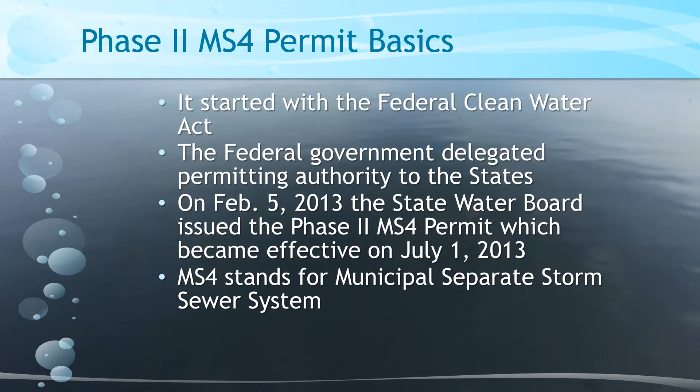Now this permit became effective on July 1st, 2013, and as I mentioned, I got ahead of myself, but MS4 stands for, again, Municipal Separate Storm Sewer System. It became effective July 1st, 2013, and it's a 5-year permit cycle.

Each year we call a permit year, and the permit years are the stormwater year. So here in California, if we want to know how much rain we got this year - or maybe we should say how little rain we received this year - we'll look in the newspaper and it'll give a number, and that number will go back to July 1st.

So if we look in the paper today, if they're doing it correctly, it should be measuring rainfall back to July 1st, which is nil to none here in the state. Hopefully with the El Nino year, what they're predicting, we'll see more in the future.

But the same way in the regulatory world - when it comes to stormwater regulations, it's July 1st through June 30th. And so those are our permit years.

Now, many of these requirements are new to these Phase 2 municipalities. And the state fortunately gave them some time to basically phase these things in, to ratchet up their program. And so they allow certain aspects of the program to begin during different years of the permit.

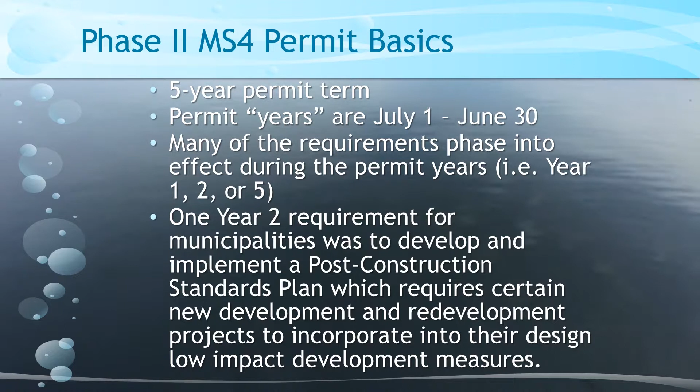One of those requirements for year 2 was for municipalities to develop what they called a post-construction standards plan, which requires certain new developments and redevelopment projects to incorporate into their design a process called low impact development measures. And we'll talk more about this - what is that, and what did that involve?

So the Phase 2 MS4 permit also required some other things like adequate legal authority. The state realized that when they were delegating authority down from them to the municipalities to help implement a lot of these stormwater goals they had, the municipalities would need to develop their own legal authority to be able to enforce it.

So one of their permit requirements was to adopt or revise new municipal code, new city ordinances that would require it. And it covered many different areas. One of the areas specifically that we're going to talk about today involves new development and redevelopment. But there were other areas that their ordinances had to address, such as during construction.

So erosion and sediment control plans need to be implemented during construction, and there needs to be inspections. And there's other areas involving illicit discharges - you've heard 'only rain down the drain.' So the municipalities had to basically build this adequate legal authority to cover that.

And the Phase 2 MS4 permit required project owners and the municipality to continue to monitor these devices that are being installed to mitigate stormwater measures. So a lot of times we use the term treatment, and we'll talk about this more later, but what is treatment? Well, in the context of this permit, treatment falls into several areas.

One, infiltration, where we're infiltrating water into the ground. Two, bioretention, which is using like a rain garden - it has some infiltration, but it also incorporates another aspect called evapotranspiration, where we're using either plants or solar heat to evaporate or transpire water into the atmosphere.

And then the fourth is capture and reuse - a big topic during this drought about being a good steward of your water runoff and capturing that and reusing it if you can. Now, what do all four of those have in common? Those four areas of treatment?

Really, what it does is it reduces the amount of discharge, does it not? Whether you're infiltrating, bioretaining, evapotranspiring, or capturing and reusing, all of those have in common that you have less discharge.

The first one is to take a project and basically divide it into logical segments when it comes to drainage. They call them drainage management areas. Some projects are diverse, and water is being dealt with in different ways in different places, so the state wants it split up into these DMAs, these drainage management areas. Other projects are quite simple, with really only one basic way water is handled, and therefore it can have a single drainage management area. Again, we'll come back to this and talk about this in more detail.

It requires including source controls for certain types of specific activities, and we'll see how that plays out. It requires the incorporation of LID measures into the design. There are 9 distinct measures that we will cover that the state requires.

It requires treatment of stormwater, and as I mentioned, that's through these methods: infiltration, bioretention, evapotranspiration, and capture and reuse. It requires not only speccing out these treatment methods, but sizing them so that they meet the objectives specified in the permit. And then there's very specific numeric objectives given. We're going to go through a couple calculators that you can use to meet that.

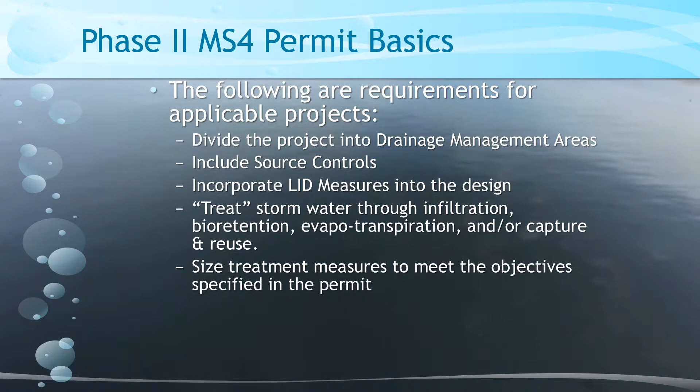And then it also incorporates what we call hydromodification measures. Hydromodification is a big word, but if you break it down into just what it sounds like - hydro, water, modification, to modify, to change - the idea is that when you develop, you have hydromodification. Now, when I use that term, I use it in a neutral cause and effect way. In other words, I'm not here to say new development's bad because it changes the way water should drain off your site, therefore we want to avoid new development. No, when we use, and I believe when the state uses hydromodification, it says when you design, you can't help but modify the way water runs off. If you're creating impervious surfaces, you're changing the way it is. Therefore, let's understand that process and see if we can offset some of that by the way we design our project. We'll go through that more in a moment.

And then also, it requires not that you just do this in design and that you actually construct it, but this permit actually requires the municipality who is overseeing this program and the owner of the project to have a perpetual obligation to what's being installed. And there's no off-ramp, which is a little bit scary, but basically these systems need to be installed and, according to the state, need to be kept in an effective state of operation. So there is a requirement to have an operation and maintenance plan, a requirement to have an annual self-certification by the owners of these devices, and an obligation for the city or county to make sure they are kept in an effective state of operation.

Of course, like with any regulation, there are some exceptions, and for time's sake we're not going to delve into that at this point. Next level are called small projects according to this permit, and they are projects creating or replacing 2,500 square feet to 5,000 square feet of hardscape.

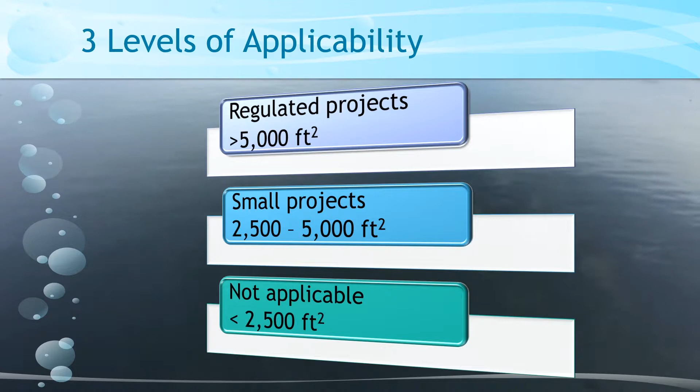And then the top tier are the regulated projects. Not that small projects aren't regulated, they are, that's just what they call them. The top level is called regulated, and that's 5,000 square feet or more. Let's take a closer look at the small and regulated projects.

So small projects specifically includes new construction creating impervious surfaces between 2,500 square feet and 5,000 square feet. So if it's a new project creating that, could be a new parking lot, could be a new school. We'll look at some examples, including a very specific example later.

It could also be redevelopment, a demolition of another small site and redeveloping that site. And if you are even replacing a hardscape or impervious surfaces of 2,500 to 5,000 square feet, then you would be a small project, such as the replacement of even a parking lot between 2,500 and 5,000 square feet.

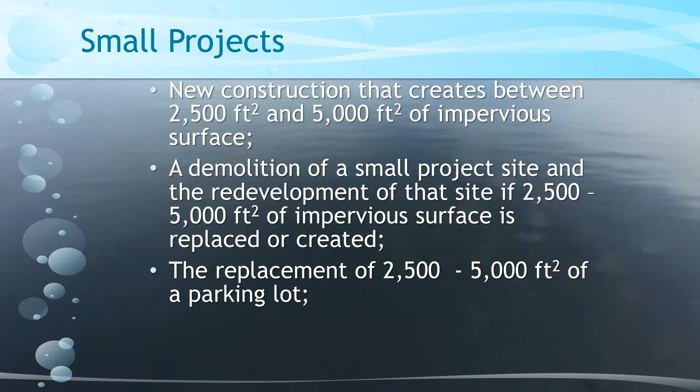Now, small projects also include the construction of a new parking lot that's less than 5,000 square feet. Now catch that subtle difference: one was redeveloping a parking lot, basically replacing a parking lot, one was a new parking lot.

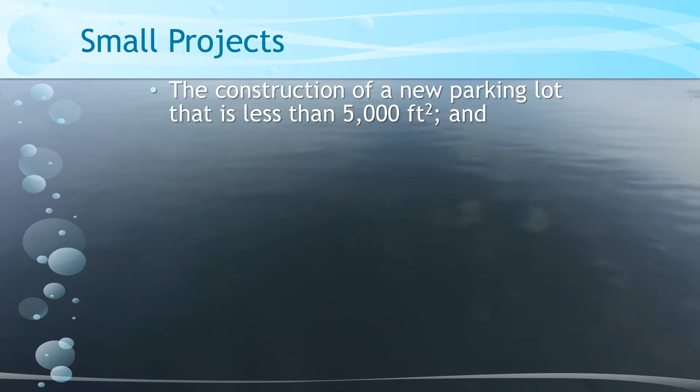Now some of you who are more educated in this should be thinking about, what about routine maintenance? I thought resurfacing a parking lot doesn't trigger these requirements. Well, you're partially correct. It keeps you out of the regulated class, but it still kicks you into that small class. Now before you start hyperventilating, this small class is not really a big deal, so it'll probably be okay. You're not going to really have a hard time meeting this.

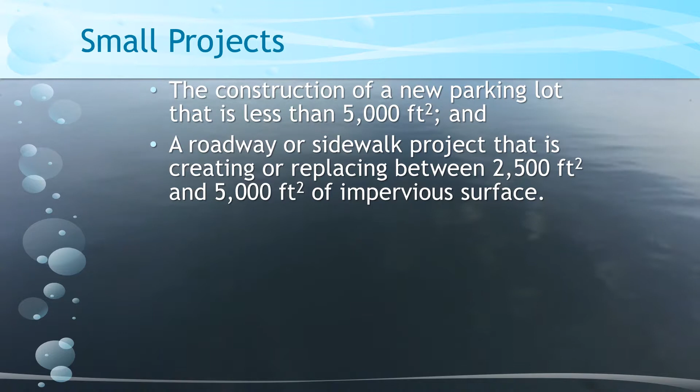Other small projects, according to the permit, is a roadway or sidewalk project that is creating or replacing between 2,500 and 5,000 square feet of impervious surface. It also includes, here's another acronym for you, LUPs. You may recognize that from the construction general permit. But linear utility projects, what are they? Well, they could be underground projects like a water main project, a sewer line project. It could be an above ground utility like a PG&E transmission line. They are not considered to be part of small projects. We'll see another reference to this later.

And a single family home is a small project, will always be a small project, even if it's a really big single family home, bigger than 5,000 square feet. Even if it's a lot more, it will always be a small project. Now, unless it's part of a larger common plan. And we're going to look at some examples today of that. Once it is part of a subdivision, it would then very likely be regulated.

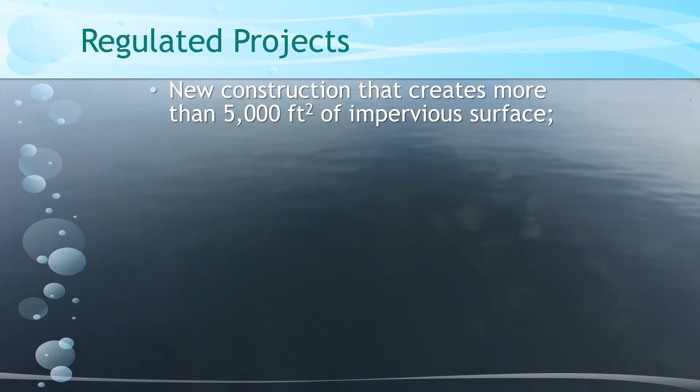Okay, now let's turn the corner and look at regulated projects. What are regulated projects? Well, as we saw on the first slide, it's creating more than 5,000 square feet of impervious surface. And it can also be what's called significant redevelopment. So it's where you have maybe a demolition of a site and the redevelopment, the replacement of impervious surface, that's 5,000 square feet or more. Or it could be replacement or creation in a redevelopment project. The replacement of more than 5,000 square feet of a parking lot would also be a regulated project.

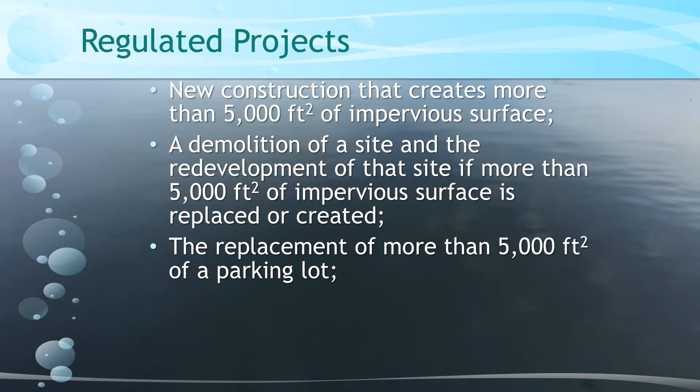But let's look at some things that regulated projects do not include according to the permit. And it's probably an easier way to define regulated projects by looking at what's exempt. And so these are real important to take a look at. As I mentioned just a moment ago, a single family home, detached, that's not a part of a larger common development or common plan, they are considered to be a small project. It doesn't matter how much square feet of impervious surface they have or are replacing, it will always be a small project. Projects that are exclusively interior remodels, if nothing's changing outside, it could even be a huge warehouse. If it's exclusively interior, it is not a regulated project.

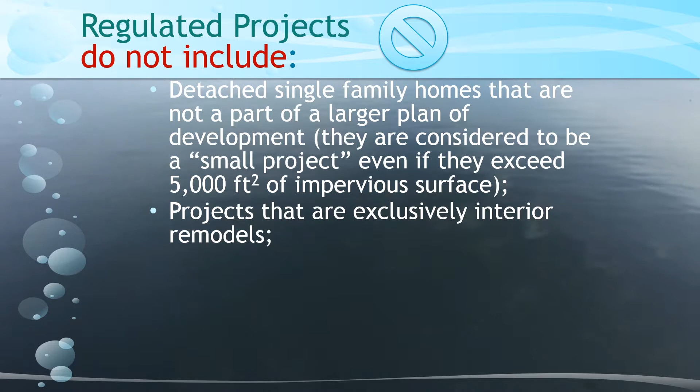Routine maintenance or repair, such as an exterior wall surface replacement. Now, if that could be categorized as routine maintenance, then possibly you have your exemption there. But if it's a facade replacement that's not considered routine maintenance, and that's really who's going to make the decision on that, it's really going to be the municipality's plan check process. They're going to make the call. They're the ones interpreting this regulation, and they're going to look at their post-construction standards plan, make that call. Pavement grinding and resurfacing within the existing footprint is also routine, and roofing replacement or repair is also routine.

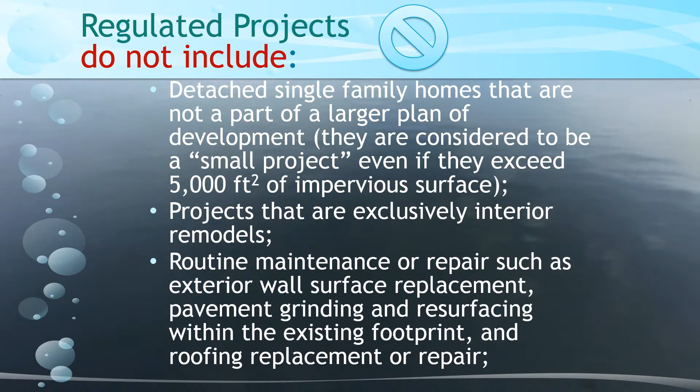But we did a project here, I think it was early this week or late last week. We're looking at a concrete or sidewalk replacement, and we could not fit that under routine maintenance. However, on that same project, they were doing a parking lot resurfacing, and that clearly was routine maintenance. So the municipality we were working with would not accept that our sidewalk was routine maintenance.

Other things that are not included would be projects consisting solely of sidewalks or bicycle lanes built as a part of new streets or roads and built to direct stormwater runoff to adjacent vegetative areas. And this is language right out of the permit. Projects consisting solely of impervious trails built to direct stormwater to adjacent non-erodible permeable areas. Again, it's kind of meeting already the intent of it, and maybe that's why they're exempting it. Projects consisting solely of sidewalks, bicycle lanes, or trails constructed with permeable surfaces. Is DG, decomposed granite, a permeable surface? Good question. Technically, yes. Functionally, probably not. But technically, it would be considered a permeable surface.

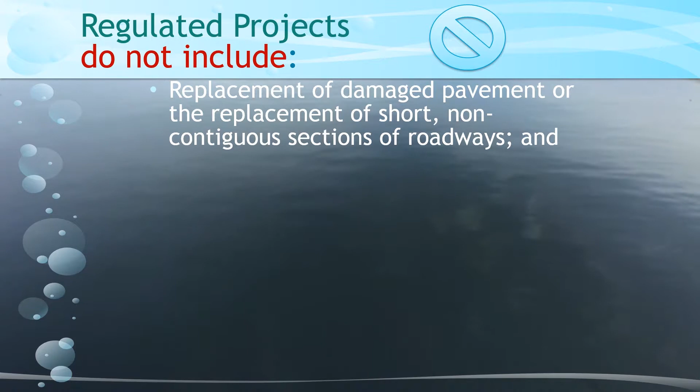All right, and other projects that would not be considered regulated would be a replacement of damaged pavement. And I think this may have been one of the questions we were getting at too. Replacement of damaged pavement or replacement of short, non-contiguous sections of roadways. So roadway repair, sidewalk repair, because the roots are pushing up sidewalks. That would not be a regulated project. Now, please remember though, it could still be a small project. We're just talking about what's not a regulated project.

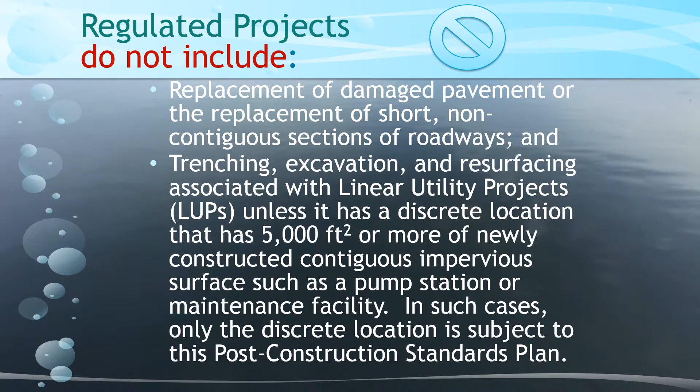And trenching, excavation, and resurfacing associated with those LUPs, those linear utility projects, unless it has a discrete location that has 5,000 square feet or more of newly constructed contiguous impervious surface areas. What are we talking about? It would be like maybe pipeline companies putting in a pipeline, and then they have these breakout stations or these pumping stations or these control stations where they have a parking lot, maybe they have a small office building. And so that would be a type of project that, although it is a LUP, it is a discrete area that could be considered a regulated project.

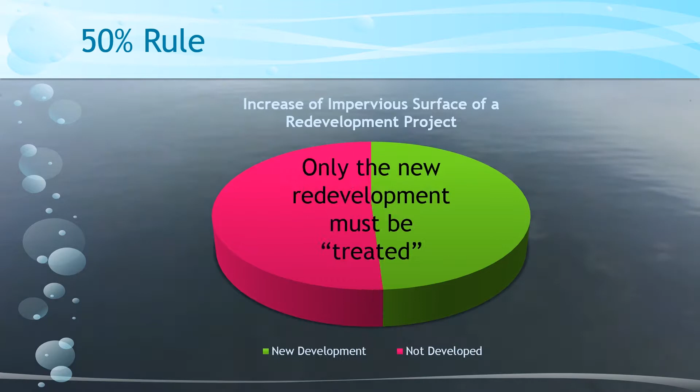Conversely, if it's more than 50%, then the entire project has to be treated. And so that's a number to look at.

Now, some of you may also do capital improvement projects. That's something important to remember there. Roadway projects, you want to look at that number. And there's some specific language in the permit and also in the post-construction plan that deals with roadway projects in regards to this 50% rule. But in general, if it's less than 50%, you're only dealing with that. If it's more than 50%, you're treating the entire project, the entire site.

So we covered the why. We covered who needs to be covered or subject to this. Now let's talk about the what. What is required? And this is where we're going to get more into the nuts and bolts now of how this works.

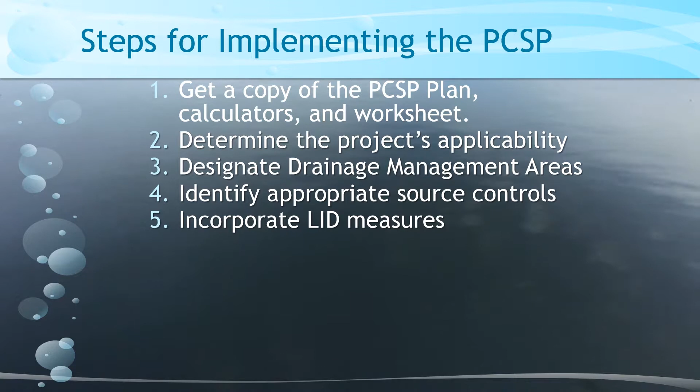So there are some steps for implementing this post-construction standards plan that I want to cover. First off is get a copy of the actual document, the post-construction plan, the calculators, and the worksheets. Determine the project's applicability. Designate those DMAs. Identify appropriate source controls. Incorporate the LID measures. Select and size those treatment controls. Incorporate hydromodification measures, and then prepare the submittal. I'm just going to list these out, and we're going to go through each one of these one by one. So let's take a look at the first one.

You need to get a copy of the plan, which, if you are in the City of Chico, good news is you had one. I don't have one right here in front of me, but it looks like the one on the screen. You got a copy of their draft plan that they are quickly on the way to revising. And actually, this series of workshops is part of their process of finalizing these plans. This is part of their outreach to the community, to the stakeholders who are going to be having to work under this, to get a view of how this process works and for you to be able to review the draft plan.

Now, if you have any questions, you can contact Angela Spain. Angela, raise your hand. Or Rich Burgee, right behind her. And Rich, how can they get a hold of you if they have questions or comments? Or Angela, who's the primary contact? We'll have some business cards on the table. Okay, so there'll be some business cards back there. And as you go through this document, take a look at that. But basically, this is what's going to be required of new development and significant redevelopment.

This calculator will be downloadable from each municipality. The one you see on screen actually came from the State Water Resources Board and was originally used as part of the construction general permit. Those of you who write SWPPP plans for construction sites probably recognize this. Now it's actually on the State Water Board's SMARTS database website. This calculator was developed by the Water Board for small projects operating under the Phase 2 MS4 permit, and we'll come back to that.

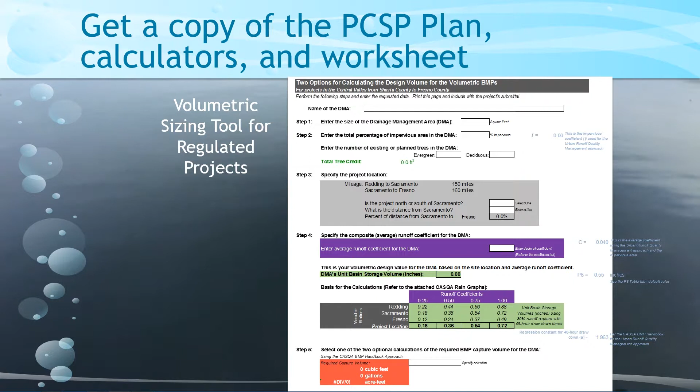This calculator here is a volumetric sizing tool we created as part of this collaborative effort to make sizing of BMPs easier. We'll go through it and show you the two approved methods for sizing BMPs. You're given an option as a developer which method to use. We've noticed that sometimes one method is more advantageous than the other, so we wanted to give you the ability to choose whichever is more advantageous for your particular project. This is also an Excel spreadsheet you'll be able to obtain.

The next item is to determine your project's applicability. Now, for the remainder of this talk, we're going to take a look at a fairly typical project. This is actually a real project, not here in Chico. It is a project that I worked on in Benicia.

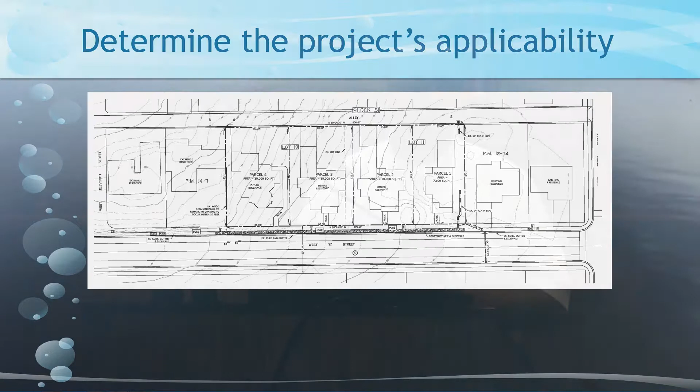Benicia is part of the Bay Area. Their regional stormwater permit, they call that the C3. Those of you who have done development in the Bay Area know it by C3. That's their post-construction standards program, and that's been in place for quite some time now. There are a lot of similarities, some subtle differences, but a lot of similarities.

So this is a real project that went through these post-construction standards and treatment. An example of a small project would be, we're looking at a plan here of 4 new parcels, but let's say only one of those parcels was actually going to be built. The rest, they aren't going to build, but right now it's only going to be one house. That is, as we saw earlier, a small project. Doesn't matter, could be 6,000 square feet, could be 20,000 square feet. It doesn't matter how many square feet of new or replaced impervious. If it's a single family home, not a part of a larger common plan, it is a small project.

Now, though, if we had all 4 of those lots being developed, which was the actual case of this project, on the right-hand side they had a small existing home that I think they were going to greatly renovate and then add 3 new homes to the west, basically. Then that would be a regulated project. Why? It's no longer a single family home, and it is certainly over 5,000 square feet of new impervious surface. So that would be a regulated project.

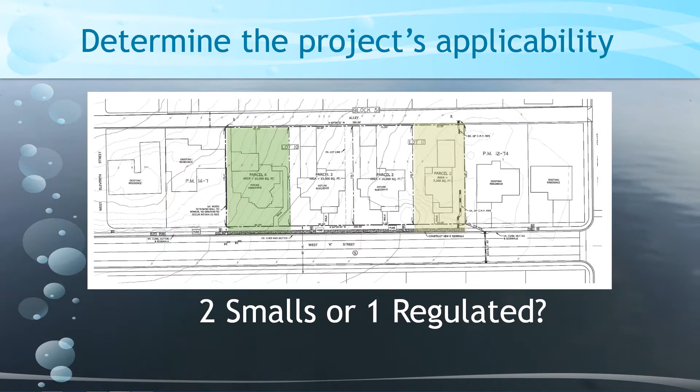Now, what about this scenario? And we see this a lot. 2 different homes being developed, especially in these post-recession times. Well, some people say we're still in the recession, but hopefully we're getting out. We see unfinished lots that are now starting to be developed upon. What if we had 2 of them being built on? What if we had 2 different contractors building on them, maybe two different owners? Would it be two small projects or one regulated project? What do you think? How about some participation? Two separate owners, it would have to be two small projects.

Two small projects? Although was the land split into the four parcels from one person? You're asking the right questions. It's really going to depend, ultimately, on the map approval. Is it still under a valid tentative map? What if the map is expired? And I'm talking to planners. You guys know your business way better than I know it. But if it still could be considered part of a common development plan, and it still has a valid map, then yeah, it probably could be considered part of a common plan.

Is there a lot size max in there for that? Not in this regulation, there's not. The only thing we looked at is things we've already seen, the 5,000 square feet or the 2,500 square feet. But in this case, if you had two projects even being built by two different individuals, but it was part of the same approved plan, then it very well could be considered regulated. Now it gets really muddy really quick.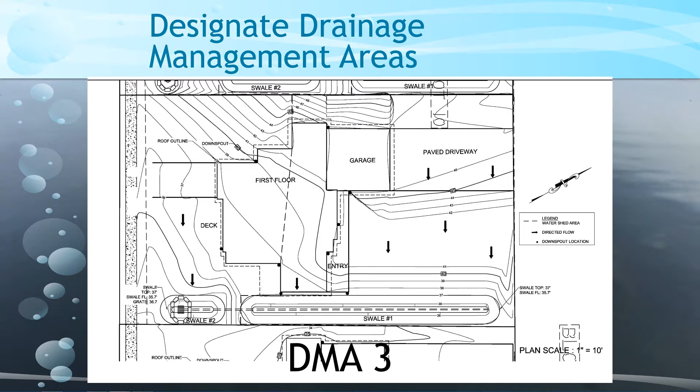DMA 3, kind of a 2-part bioswale. And then what is a bioswale? A bioswale goes under different names, rain garden.

Basically, it is a bit of a detention center where it's combining 2 of the aspects: infiltration, giving a place for water to infiltrate into the ground, and also using the evapotranspiration effects where the plant uptake. So typically a bioswale would be a depressed landscaped area that has been engineered.

So usually there's as much or more below ground than you see above ground. For example, you have some engineered soils, and you'll see a spec as we get towards the end of our talk that's got to be 18 inches of growing media. You're going to have usually a rock layer for reservoir capacity. You typically have an underdrain that will allow excess water to flow off site to maybe the storm drainage system or some other place, maybe a retention basin or some other destination.

So it's allowing water to flow to it, to infiltrate, to evapotranspire, and hopefully with the idea to reduce the amount of discharge. And so those would be our 4 DMAs. In this case, a fairly logical sequence because each particular home site is going to be treated separately with a bioswale there.

And you can see the source controls that are identified. These come out of the permit. This is a list of activities or pollutant sources that might be present or associated with a certain project. So for example, they say accidental spills or leaks, interior floor drains. Well, you might say, I don't have any interior floor drains. And what we mean by that is an interior floor drain that ties into the storm drainage system, not into the sanitary sewer. Parking or storage areas and maintenance, indoor or structural pest control, pools.

Now, residential could have pools, spas, ponds, decorative fountains. But some of these are very specific, like restaurants, grocery stores, fueling facilities. And again, what you would want to look at is the definition for each one of these, what's included in it, what's not included in it. Now, one of the things that's always bugged me about this is that some of these are really more activity than they are design, like the first one, accidental spills and leaks.

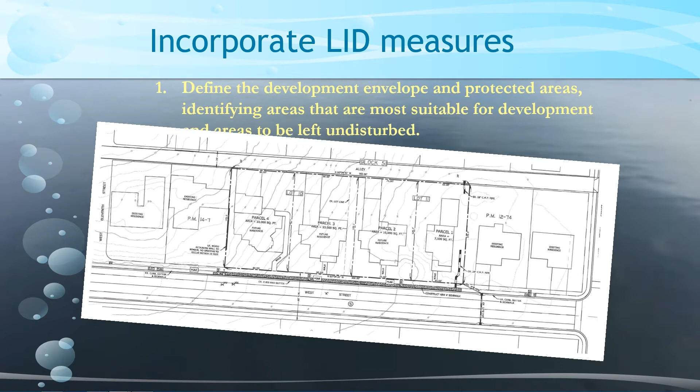So, first one, define the development envelope and protected areas, identifying areas that are most suitable for development and areas that are to be left undisturbed. And so what I want to do is rotate this a little bit and show you the actual aerial photograph. This is the actual pre-development photograph for our example project. Again, you can see down at the bottom right corner, I don't have a laser pointer, which I usually have, but down at the bottom right corner, you can see an existing house that's going to be either demolished or renovated. And on that lot, within that blue line, that blue rectangle, is going to be the 4 houses. So the development envelope's pretty much set.

There's not much room to protect. We'll talk about trees here in a moment, but it's not like we have a stream passing through it or adjacent to the project. It's not like we have an area that's more a wetland area of this project. Now, a large commercial development, a really large project could have areas that, okay, we want to look at this. How are we developing it? What areas are most suitable for development and areas that should be left undisturbed? We're going to get, though, more into that here with the next points. The next one is to concentrate development on portions of the site with less permeable soils and preserve areas that can promote infiltration.

So, what does that mean? Well, that means that if your site has multiple soil types and they're different, let's say you understand what hydrologic soil group is, HSG classifications, they're A through D. So A is the most infiltrative soils, D is the least infiltrative soils. If you had one section of the site that was A and one section that was D, according to the state, where do they want you developing? D, right? What if the developer wants to develop on A? It's going to be a problem.

Let them. Well, yeah, you could let them, but you're going to have a hard time if you get audited by the EPA or the Water Board to say why you let him. Because they're going to want to look at the rationale of how they met the LID measures. And so, in our case, I went to the web soil survey, actual site, I did my boundary with those blue lines, and on the web soil survey, it all came up as a single soil type.

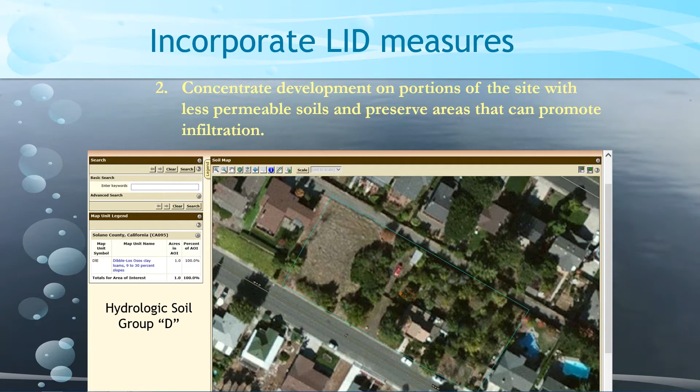So I was fortunate, I didn't have this quandary to figure out where to develop this site. It's all one single soil type, so it really was not a big deal in this case. But I can see projects where it's going to be a big deal. Again, the municipality didn't write this requirement. This is being required by the State Water Board, and they consider this an extension of the Clean Water Act.

Could you get in trouble if they found you developed contrary to this? Yeah, big time trouble, yes sir. Are we supposed to require the owner to take a drill rig out to the site, use soil boring, and characterize the soil? Well, yeah, and that's not unusual, because actually this site did that.

Most sites have a soils report. Well, it would be unusual for a single home. A single home would not be a regulated project. Right now, we're only talking about regulated projects.

So, no, it's really not uncommon. And the web soil survey, something like this, would suffice in meeting this LID requirement. I mean, if it is all one single soil type according to the web soil survey, I'd stop right there. That's my proof.

Now, I also want to acknowledge that I believe this will be the most heated discussion you'll ever have in all of these requirements. Aren't you kind of illustrating a single project though, with a single owner? No, there's four — there's four homes being built here.

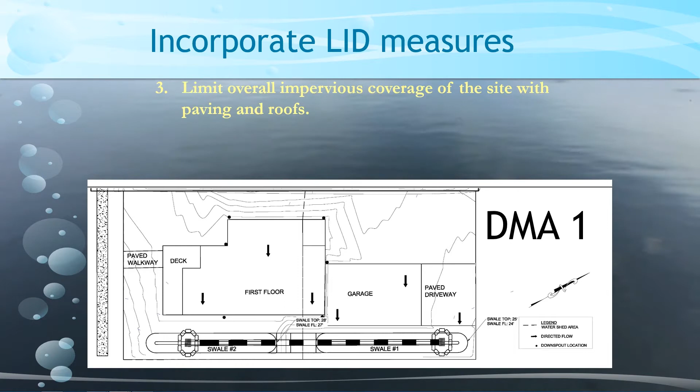So, third of the nine requirements under LID measures is limit overall impervious coverage of the site with paving and roofs. That's what it says, limit. Now again, they don't define these things, and we really struggled with how to

demonstrate that these nine LID measures were met. And what we ended up doing, after really consulting with various municipalities, was this worksheet you have here, which is what the developer's going to submit. We have nine boxes where they're going to give a narrative explanation of how they met that — how did they limit it?

And we're really leaving it up to them to show us how they did that. Now, as long as there's some rationale behind it, some logic behind it, showing that they did limit the overall coverage, if I was a plan checker, I would accept it. I've got my base covered in requiring that they show how they limited it. I have the documentation to show they limited it.

So, if the site is completely paved, which it wouldn't be, then we probably need to talk. But there's a lot of green on this. Yes, sir — you think, well, for example, the placement of the building in relationship to a common driveway may be required?

I think you can. What worries me — and again, I didn't write this regulation, this is me going to the other side of the fence — what if we get a plan checker, none of you I'm sure, but some of them get rather gung-ho. And I could see a municipality where they're really riding this developer, trying to whittle it down and whittle it down and whittle it down.

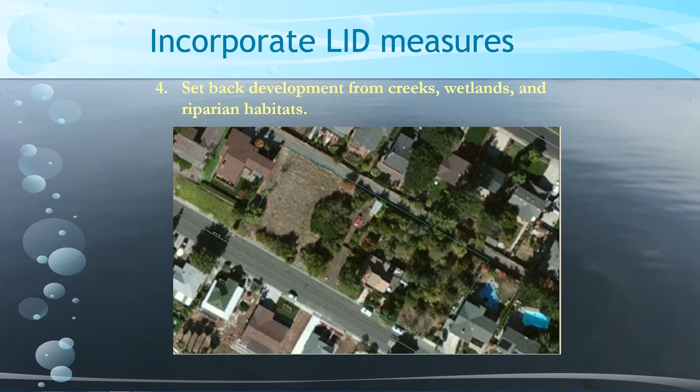Okay, let's go to 4. Setback development from creeks, wetlands, and riparian habitats. Well, for this particular project, not an issue. Now, is it ever going to be an issue? Is this the first time they're dealing with this type of stuff? No, there's a lot of other regulations and ordinances that already require that, so it shouldn't be a big deal. It really should not. So number 4, I don't think it's going to be a real issue. One, you won't get projects that often with this. And the other thing is, even when you do, there's other regulations already requiring this. So it won't be a big deal. Preserve significant trees. Chances are you already have ordinances in place that require that to a certain extent. So again, probably not a huge deal here.

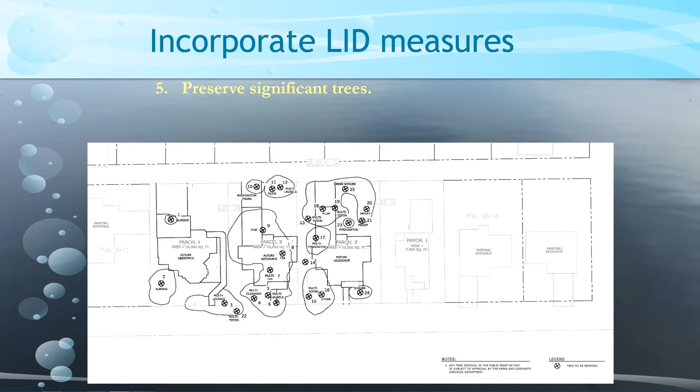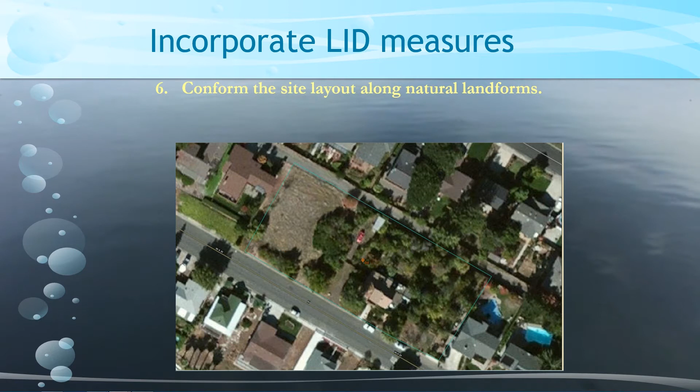But in this case, and I have the plan here, most of those scraggly little trees were being pulled out to make room for the houses they are putting in place. But the landscape drawing, and I didn't show that here, is putting trees back in. Again, we're giving a narrative box to show how they're going to address that. Conform the site layout along natural landforms. And I show here the plan and the side view. Now, one of the things that they did do with these bioswales, and they had to do it for functional reasons, is they had to terrace some of these so that they would actually work and flow and be able to retain the amount of water. So in just doing that, yes, they've demonstrated they've conformed the site layout along natural landforms.

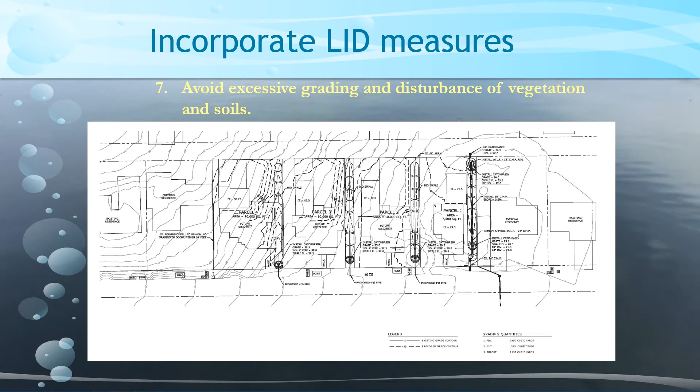7, avoid excessive grading and disturbance of vegetation and soils. Well, the entire site has to be developed in this case. And again, I look at keywords, avoid. We can't avoid it, it's unavoidable. The project by definition is grading out the whole thing. But then if they came back and said, however, we're going to landscape this entire thing, to me that meets the intent of it. As long as they've described how they're doing this, then I would accept that.

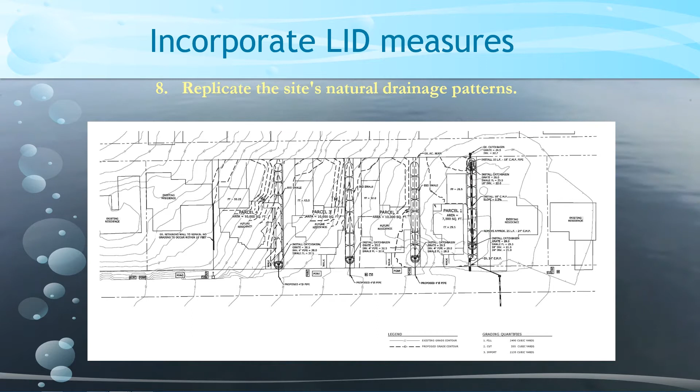8, replicate the site's natural drainage patterns, kind of similar to number 6, I think it was, that we saw. And if you look at the topos here and the placement of the bioswales, fairly close. And then 9, detain and retain runoff throughout the site. Well, with the use of the bioretention cells, yeah, they're definitely detaining and retaining runoff throughout the site. Each module, each model, I should say, has that. All right, so those were the 9 LID measures. And if you look at your worksheet here, we have a place where the project proponent is going to explain how they're meeting each one of those.

The next one, select and size treatment control measures. Now, the first thing is selecting. And we talked about how these treatment control measures are not what many times you might think is treatment, like activated carbon, or reverse osmosis or some sort of treatment. When we talk about treatment, we're again talking about infiltration, bioretention, evapotranspiration, or capture and reuse. And so there's a table given in that document that was handed to you that has different types of measures here. Things like stream setbacks and vegetated buffers, if you have that type of situation.

Soil quality improvement, engineered soils is what it's about. Tree planting and preservation, porous pavement.

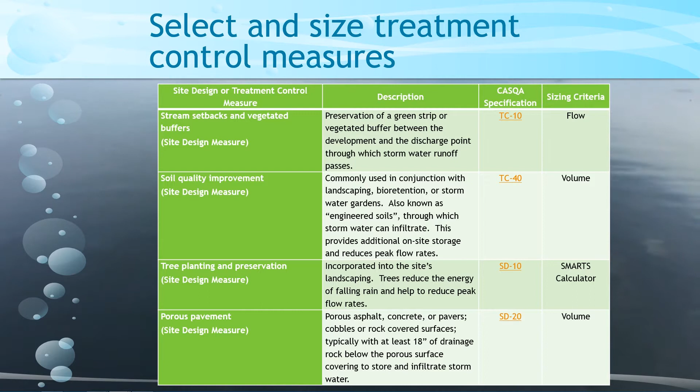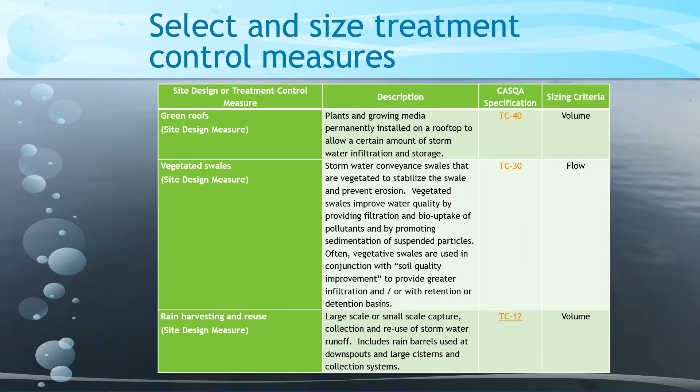Green roofs, vegetated swales, which by the way is different than bioretention swales or what we have on this project. Without getting too far into it, vegetated swales is more of a flow-through type of device, and so our sizing criteria is going to be flow, where bioretention is going to be volume.

Rain harvesting and reuse, and then in the brownish color there, you see the one that was selected for this project, bioretention and rain gardens.

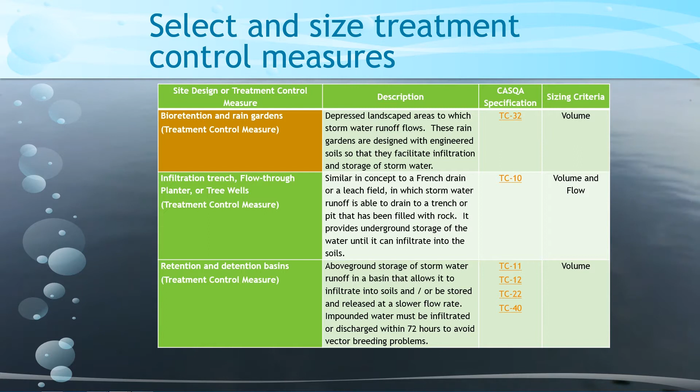Then you have other things like infiltration trenches, flow-through planters, tree wells, retention and detention basins. Some of these are broad enough that they can accommodate other specific types of devices that infiltrate, bioretain, evapotranspire, or capture and reuse. So you'll select it, and then you will size it.

Now, first off, let's take a small project. I know we were talking about a regulated project, but just so we can show the calculator for a small project and how it works, let's assume it's only one of those houses being built. So it's a small project. It's this one that you see on the screen.

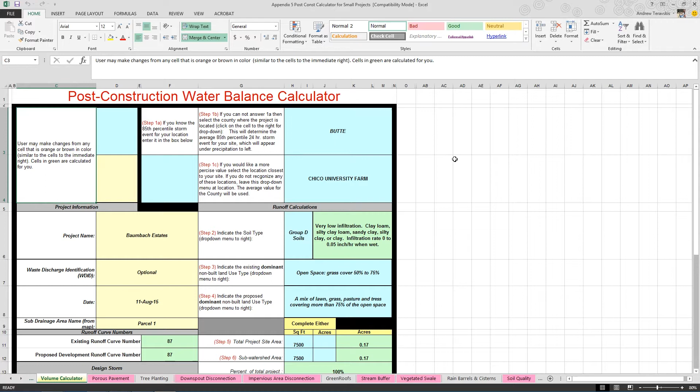So what you'll do is open up the Excel spreadsheet called the Post-Construction Water Balance Calculator. This calculator was developed by the State Water Board. Let's see, I know you can't see that on the screen, I'll try to zoom in a little bit here. The best way is just to play with this yourself a little bit. So it's got some steps.

The first step is to show where your project is located. So you select through pull down cells where your project's located. So in this case, let's say it's in Chico, it's Butte County. So that's already selected.

And then you come down and it gives some options for weather stations. Now, some counties there'll be only one weather station that you can choose from. In Butte County, they give us 4. You may need to know a little bit about the local area and where your project's at to determine which would be the best, but you're going to want to pick the weather station closest to your project. One's Brush Creek RS, Chico University Farm, Oroville RS, and Sterling City RS.

Unfortunately, they don't give a lot of definition in this tool, so you're going to need to figure out which one best fits. Chico, our project's in Chico, that's probably going to be Chico University Farm, so we pick that one.

Moving down on our spreadsheet here, we then have to show what type of soil type we're dealing with. Well, according to the Web Soil Survey, that site was all hydrologic soil type D, least infiltrated, was clay. And so you select by pull down menu the A, B, C, or D soils, and I pick D.

And then the next step is indicate the existing dominant non-built land use type. So right now, what did the site look like before development? Well, we had a home, a small home, but the non-built area looked like pretty much open space with some trees. Your choices are basically open space with grass cover 50 to 75%, grass cover greater than 75%, natural desert, cultivated agriculture, grasslands, meadow, pasture, brush. None of the others were even a close fit, so we pick open space, grass cover 50 to 75%.

Step 4, indicate the proposed dominant non-built land use type. So what's going to be proposed? Well, we've got a home, or in this case it's a small project, one home, a driveway, but non-built areas, landscape, right? It's going to be landscaped. And if we look at our options, the best option in that list is a mix of lawn, grass, pasture, and trees covering more than 75% of the open space.

That's not drought resistant. No, that's not very drought resistant. Okay, well, you're probably right, we could pick brush or chaparral covering less than 50% of the open space. They're going with xeriscape. Whatever they end up going with, you want to figure out and just match it to what they're going with. I'm assuming it's an El Nino year and we're out of the drought.

This is one line of, hopefully it's covering more than 75% of the open space, then after roof structures and driveway and all that space. This is what it says, non-built land areas.

All right. So yeah. All right, and then we enter in some information about the project, the total project size. That lot was a 7,500 square foot lot. Sub-watershed area means if you're dividing it up into multiple areas, in this case it's just one small site, so the whole sub-watershed is 7,500 feet. In other words, we're looking at 100% of the project.

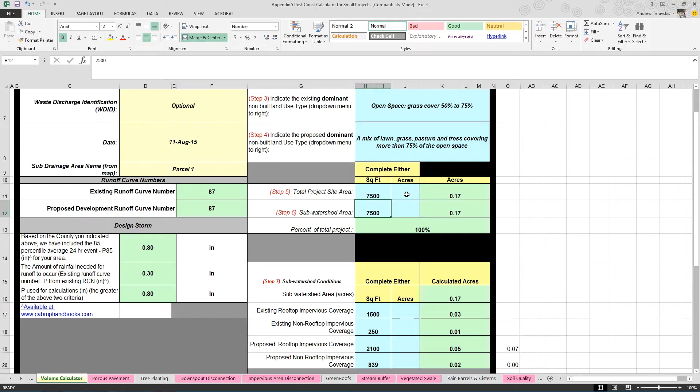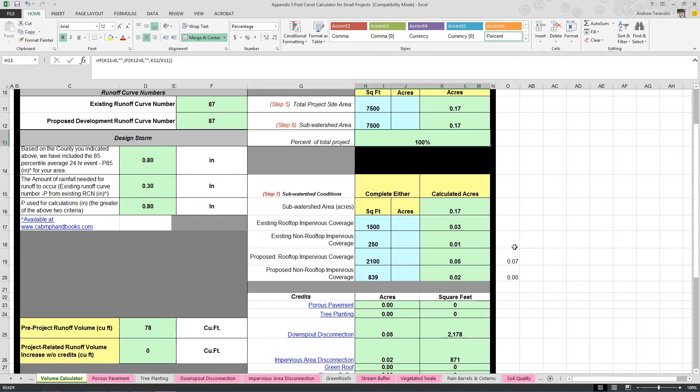Now, after we have set that into place, notice here, those of you who understand runoff curve numbers, what happened. The existing runoff curve number was 87 based on the type of land, non-built land use type. The proposed runoff curve number is the same. Now, if we were under the construction general permit, we wouldn't have to do anything more. We had met it. As long as our curve number is equal or less, then we've met it. But in this case, under this permit, small projects are required to quantify, use one of the treatment controls.

Coming down here to step 7, we need to show existing rooftop and existing non-rooftop impervious coverage. Now I assume there's a small house there, a bit of a driveway, pretty small development. I use 1,500 and 250 square feet. Proposed new, expanded home or new home, 2,100 square feet and 839 square feet of driveway and sidewalks and that type of thing. And then the last step to meet this would be to pick one of your treatment controls. Now they only require one to meet this small requirement submittal. And so I actually spec 2 in here, but you would only need to do 1.

I did impervious area disconnection, meaning that we were going to have a bioswale. We're going to channel all the water from that home to a bioswale. Which one, though, do you think they'll pick 99.9% of the time on that list? Exactly. Tree planting. Why? Because the ordinance already requires it. You've got to have trees. And by planting the trees, they've met it.

For the small project, this is the calculator they have to use. They have to pick one of those credits. They have to quantify it. But guess what? This permit does not have any objective that they have to meet. They don't have to offset it by a certain amount. They don't have to reduce their discharge by so much for a small project. Just pick one, quantify it, print this out, submit it to the plan checker with your worksheet. That's all a small project needs to do.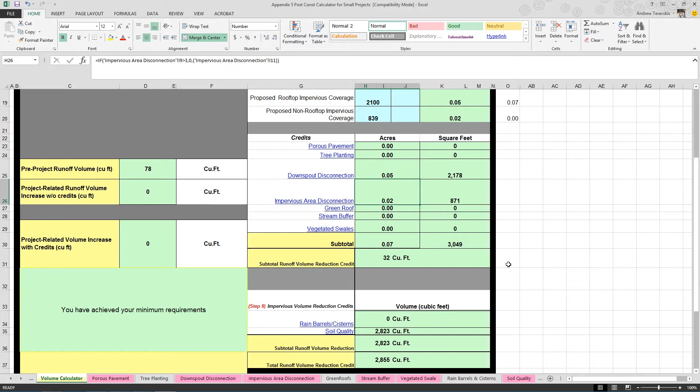Okay? Now, that's a small project. A large project, though, is a little bit different. So if we are a large project where we have all 4 of those lots, now let's just take that first lot, the same lot that we had for the small project, but remember there's 3 other lots now, a part of our regulated project. But for each DMA, our first parcel being 1 DMA, we now need to quantify our discharge, or quantify how big our BMP is going to be. So let me go back here, and we use this calculator that will be provided to you with this plan.

And let me scroll out here a little bit, just so I can navigate a little easier. So you'll put the DMA's name at the top of this, and then under step 1, you'll enter the square footage for that DMA. In this case, parcel number 1. Same one we looked at on the other tool, 7,500 square feet. Step 2 is you're going to need to enter the total percentage of impervious area in the DMA. Well, it's just a calculation. And so it's the amount of impervious area over 7,500 square feet. In this case, proposed impervious area, I should say, works out to be almost 39.2%.

Now, what are we doing here? There's actually 2 calculations working in the background here, because the permit says that the developer has their choice of methods of how to size their BMPs. And we have noticed that sometimes one method will have an advantage for the developer over the other. So we said, why don't we build a calculator that'll do them both, and then at the bottom, the developer can decide which one's more advantageous for them. And so if I scroll over here to the right, you'll see in the gray some numbers working in the background that are based solely off the percentage of impervious area. Solely off that. If you want more detail, we provide it in the document, and we also provide a video that goes more in depth on how this works.

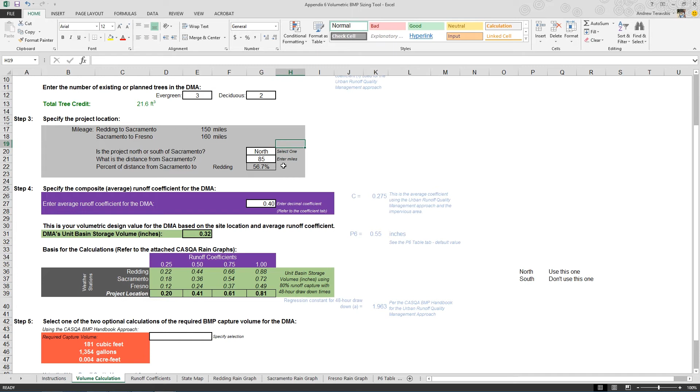So to make it easy for the developer, we just say, are you north or south of Sacramento? And if so, as the crow flies, how far north or south? What if you're immediately east of Sacramento? Then you'd be 0. What if you're immediately west of Sacramento? Then you'd be 0. But as you go up and down the valley from Sacramento, roughly how far are you? So Chico, if we were doing this project in Chico, roughly 85 miles. And so I enter north of Sacramento, 85. And what that does is it gives you an average runoff coefficient for the DMA of 0.4.

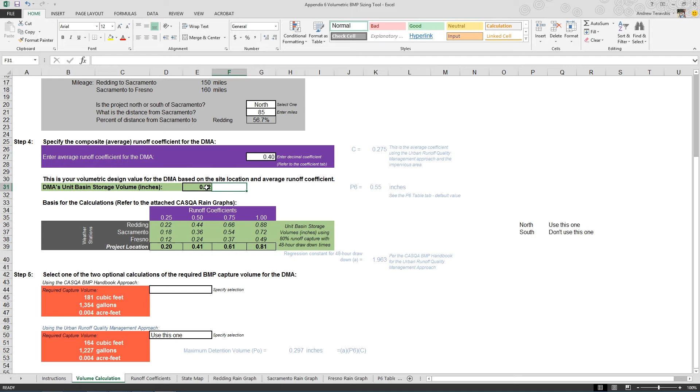I'm sorry, I skipped a step. It gives you the DMA's unit basin storage volume of 0.32. I skipped a step - specify the composite average runoff coefficient for the DMA. There's one other step that needed to happen, and that's your runoff coefficient. Now for the DMA, we do give some guidance here for runoff coefficients, and these are well-known tables that we've referenced here.

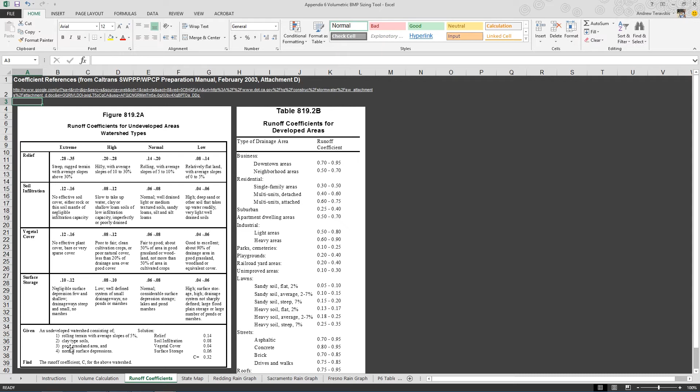I think these are from Caltrans, but they do give single-family homes 0.3 to 0.5, and so I picked a middle of the road value there. You can do a more detailed analysis of that, but I'm using a runoff coefficient of 0.4. And now, with that data, with the distance from Sacramento, that gives us a DMA unit basin storage volume of 0.32. This table comes right out of the guidance document that shows how to calculate this, and these are the tables provided for the rainfall for these runoff coefficients.

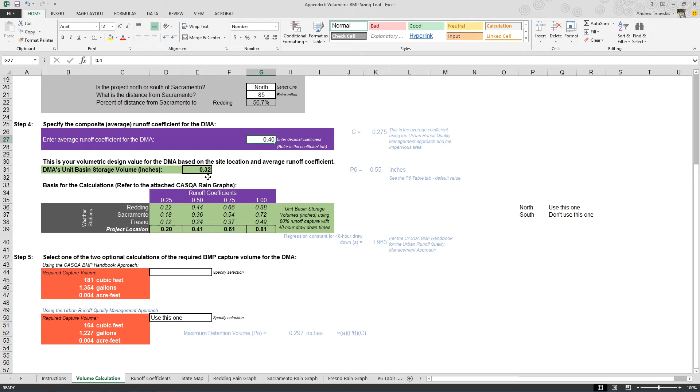So to do a reality check, we are somewhere between Sacramento and Redding, and our runoff coefficient is between 0.25 and 0.50. So we should be somewhere between 0.18 and 0.44, or 0.32, exactly where that number should be, to show you that it's right on line.

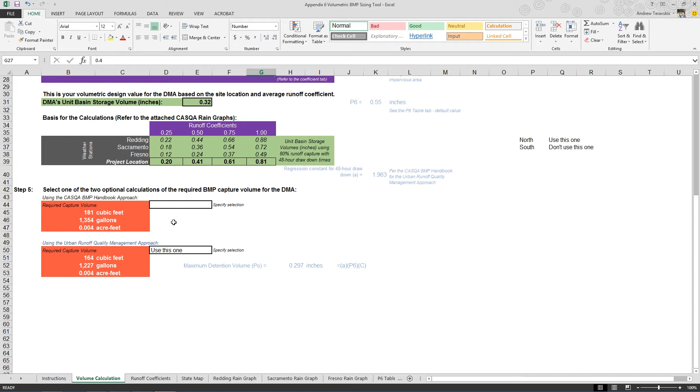So this step 5 then summarizes the 2 features that we were using to look at this, and it shows that under the CASQA method, which was steps 1 through 5, we have a required capture volume of 181 cubic feet. And under the urban runoff quality management approach, which was basing off the impervious area calculation working on the side, it's 164 - a slight advantage to the developer. Really not much of a difference, but slight. And so that's what our bioretention for that particular site needs to be sized to.

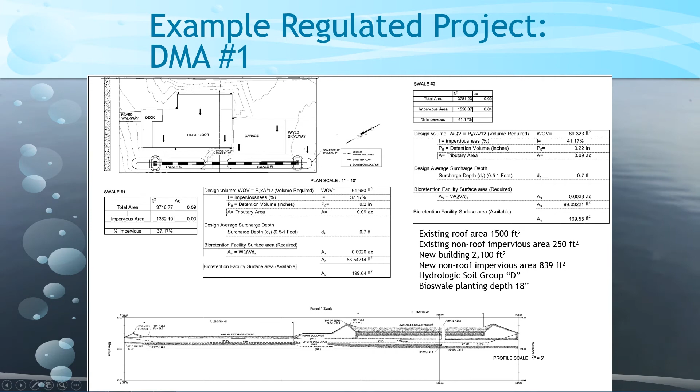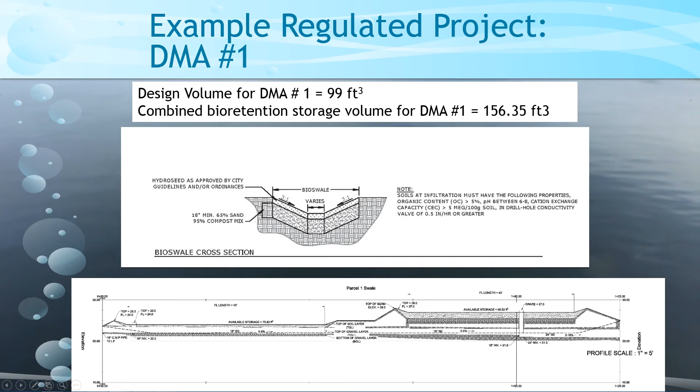All right, just a couple more slides and we'll be done. So for this regulated DMA project, we had met it right here - this is the slide I wanted to get to. Our design volume DMA, and I need to correct it because I corrected the trees, is 99 cubic feet. Our DMA that they calculated there is 156, and actually it looks like they need to up it a little bit more. So we need a little bit more bioretention storage volume because I had too many trees, or they need to plant a few more trees.

All right. So we talked about selecting and sizing the BMPs. The next step is incorporating hydromodification measures, and I'm going to go over these real quickly. These are the only standards when it comes to designing a post-construction plan, a bioretention cell or infiltration trench. These are the only standards given by the permit. So let's review some of these.

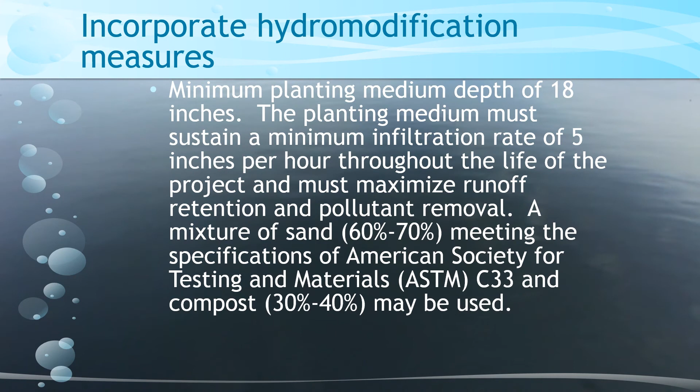It needs to be sized to treat the volumetric criteria or the flow-based criteria for that control measure. The maximum surface loading rate of the infiltration facility is 5 inches per hour. Minimum surface reservoir volume equal to the surface area of the infiltration facility times the depth of 6 inches. The minimum planting depth, this is important, needs to be 18 inches, and it even gives some specification as far as what the planting medium needs to be, and percent sand and organic material. Subsurface drainage storage area is typically gravel with an area equal to the surface area having a minimum depth of 12 inches.

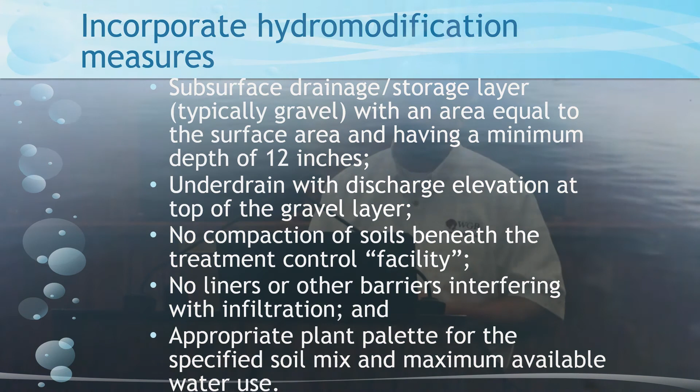So that's your rock layer. Now, it requires an underdrain with a discharge elevation at the top of that rock layer, so that if that fills up, then it can take the excess off-site. And then no compaction of soils beneath your infiltration device, no liners or other barriers that inhibit infiltration, and then appropriate plant palette for specified soil mix and maximum available water use. Now that last one, that's exactly what the permit says.

I'm not quite sure exactly what they mean by that, other than I think what they're saying is if you're going to have a system that can be fairly saturated at times, your plants need to be able to withstand that. Or if there's going to be times it has lots of saturation and other times it's going to be very dry, you have to be using a plant palette that can handle that.

And then there's one other hydromodification requirement for larger sites. Regulated projects that create or replace 1 acre or more of impervious surface must incorporate site design and treatment control measures that prevent the post-project runoff from exceeding the pre-project flow rate for a 2-year, 24-hour storm event. Now, the permit says this does not include projects that do not increase impervious surface area over the pre-project condition. So if it's equal or less, then you don't have to meet this hydromodification goal. But if you're 1 acre or more of impervious surface and it's an increase, then you do.

Now, what is that figure? Well, Rich actually gave me a website that we have linked in your notes that you can go to and actually type in your location and come up with that number. You'll have to specify that you're looking for a 2-year, 24-hour storm. But roughly, if you run it for Chico, and Chico's kind of in an interesting area because it changes rapidly, other places in the valley it's pretty consistent, but in Chico it could range anywhere from 2.5 to 2.75 inches, thereabouts.

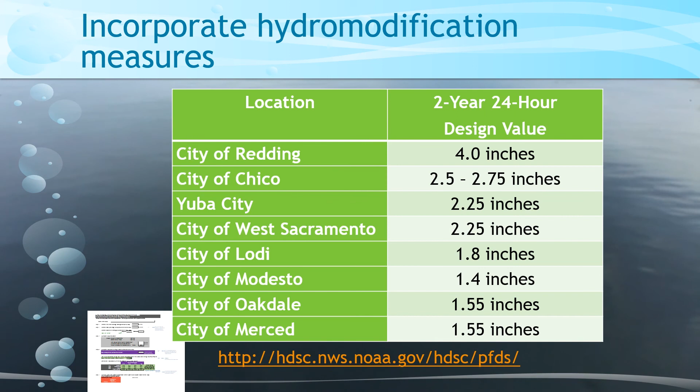And then the last thing to do is to prepare the submittal. And that's this document that you've been following along, this worksheet. Basically, this will be a part of their submittal. There's a lot of other things that will be submitted: the plans, the calculations stamped by the licensed professional. And if they're using any proprietary systems, they're going to need to have cut sheets of what they're installing. There's a whole list of things on the back sheet of this worksheet that says what's required at the time of submittal. But this will really be a tool that the plan checkers will use to evaluate the submittal, and also ultimately, if they get audited by the EPA or by the State Water Board, to show that each project went through the process.

All right. Well, when I first discussed having this workshop with Rich and Angela, we talked about a 4-hour workshop. I think there was a lot of wisdom in having a 4-hour workshop, but we didn't know how many people would actually show up to a 4-hour workshop. So we are just at 2 hours now, and what we can do is have questions afterwards. You have my contact information at the bottom of that sheet.

If you're a municipality and have questions, I know Oroville has some questions, or folks at Chico, or you're a developer having to actually do this for a real project, we have a saying in our office that advice is free over coffee. So you pour yourself a cup, call me, and I'll pour me a cup, and we'll have a chat. I won't charge you for that, but if you want us to do your entire plan, then yeah. But we can have a chat, we can walk you through that.